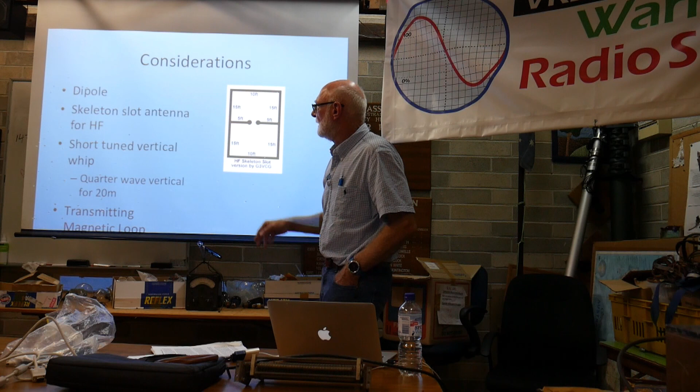So I kicked off with thinking about a dipole. I had a dipole cut for 80 at my house in Linfield beforehand, a sort of droopy dipole, which was a big corner block, and I could actually have one cut for 80 there.

Somebody put me onto the possibility of a slot antenna, and it's interesting if you started with a simple slot, which is a sheet of metal and a slot cut in it, and you feed halfway down each side, you can actually cut away bits of the slot and end up with just something that looks like this, which is still a slot antenna. But this allows you to reduce the real estate that you need, but still problems like with a dipole of you need to have it some metres above ground.

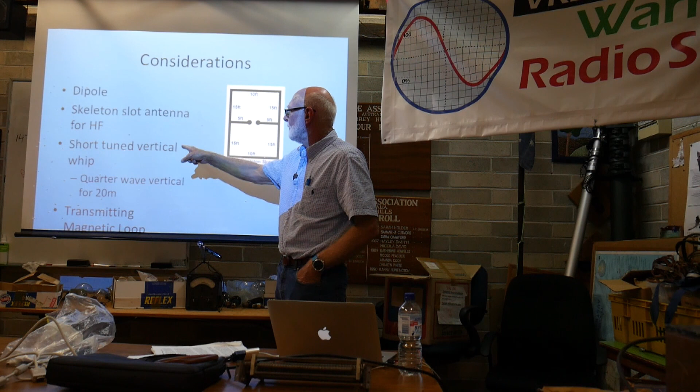I looked at short-tuned vertical whips. I could get just a quarter wave for 20 metres, so it'd be a 5 metre vertical. I looked at that. I looked at putting a slightly longer whip on the end of an ATAS automatic tuner I had for my Yaesu. But I knew that wasn't going to be very successful on 40. I've yet to fiddle around with that a bit more, but I think I'm happier to go in the direction of this transmitting magnetic loop.

What I liked about them is that it's not dependent on needing a good ground. So in a way, if you're worried about RF getting back into you and that kind of thing, it's quite a neat sort of solution. So just wondering at this point, what would people do? Has anybody got any other suggestions on what to consider apart from a magnetic loop in that sort of situation?

Have you tried tuning on the shutters? Yep, like the old crystal set, I'm sure on receive it'd be fine. On transmit, not so sure. You can't get onto the roof? You can get onto the roof, but that's common property, and I couldn't leave a permanent antenna up there. Load up the guttering? Can you buy another house? I could, but I quite like this place, as you'll see.

You don't think the wire around the corner of the roof would be invisible? Well, it would be, but then it's going to be very close to concrete gutter, that sort of thing. Again, it might be good on receive. I'm not sure about transmit. And I've got no way of then changing the orientation of it. Other ideas, though, for small antennas? Balloon. Yeah, well, there are lots of others, kites.

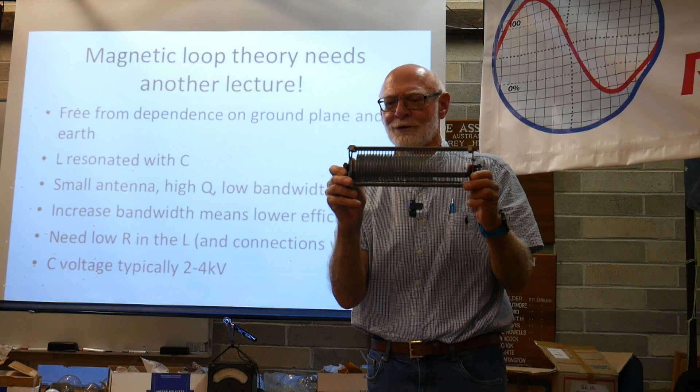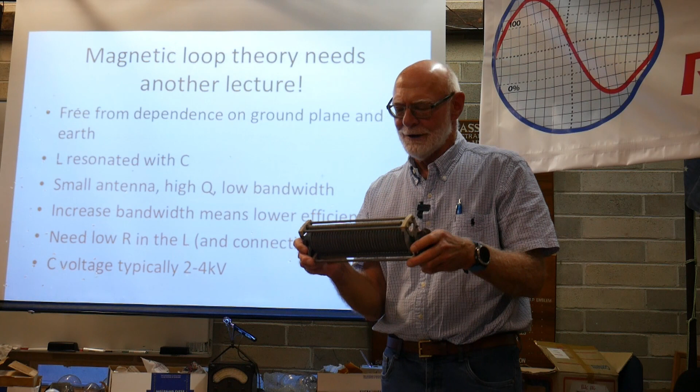And I sort of went to the books and started to look up air spacing and all that sort of thing of what's needed. It's very hard to build something that's nice and easy to use, but where you don't have big chunky things like this happening. Now, a lot of people who have talked about this will say that the best thing you can get's a vacuum capacitor, because that can be very small physical size with no problems with flashover. So that's the ideal thing.

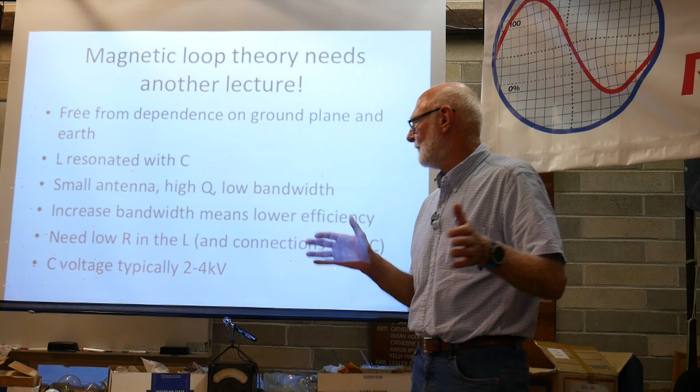You can get a Jennings or Jennings type Russian capacitor for about $200 on eBay, but you've still got to connect that to the L. And if you read Larry's article, you'll see some pictures about various attempts to do that. But then that comes down to construction. If you're going to use copper, you're going to have to get copper onto that nicely, or if you use aluminium, it's all those sorts of problems.

So the coil construction's usually one turn, but it can be 2 turns. 2 turns might seem simple. It makes it smaller physically, but it just gets a bit complicated about the feed point and where you have the capacitor. Copper's usually used, but aluminium, despite the DC resistance being a lot higher, is almost as good as copper at the RF frequencies that we're talking about. So aluminium, in fact, is quite a reasonable thing to do it out of.

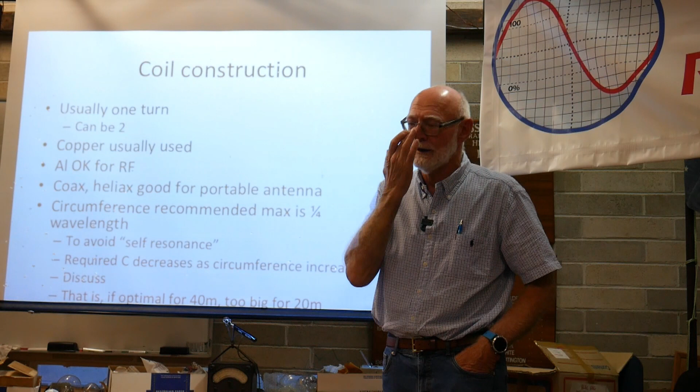And if you want to have one that's portable, then you can use things like coax or Heliax for the coil. In terms of how big it is, and this is where I need a bit more discussion. There are some antenna design things on the internet where they talk about the circumference shouldn't be more than 1/4 of the wavelength that you're looking at, and they say that's to avoid self-resonance.

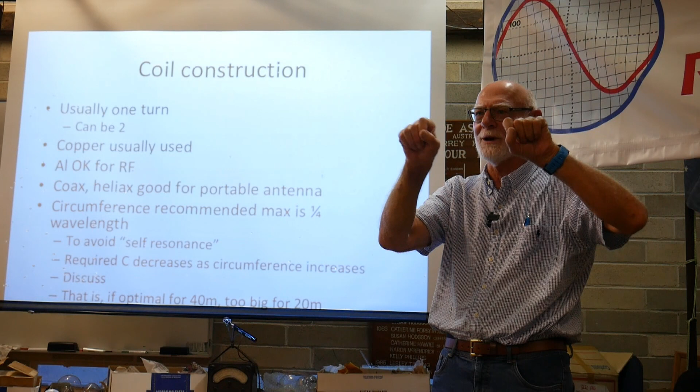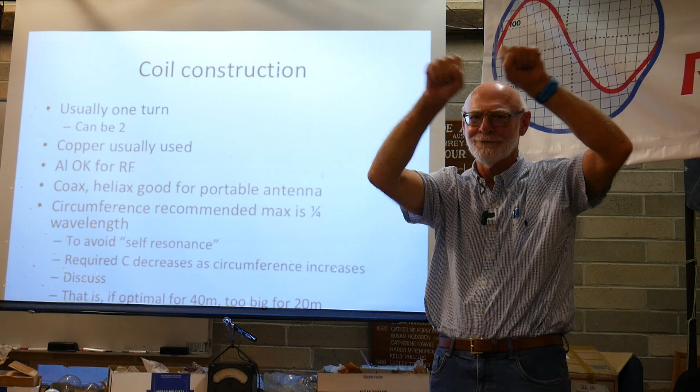And the way I think I understand this is that as the L gets of greater circumference, the amount of capacitance you need decreases, and it gets down to maybe 10 pF or something like that in the end. And I'm thinking that what they're trying to say is that if you get too big on the L, the thing will resonate with no C there, and then you've got a problem. But I don't know. Does somebody know a little bit more about that than I?

The outer's just a shield. Pardon? It'll be broken in the middle. Yeah, the outer's just the shield. So if it's got a quarter wavelength around, then you've got an eighth on each side, and that's going to start resonating if it becomes too much more. The shield itself isn't going to be effectively shielded because it's going to be resonating. No, you use the shield. What I've seen with the magnetic loop uses the inner as the radiator, and the outer is the shield, which is just electrically earthed.

No, my sniffer's got a copper tube, and the coils that pick it up are 6 turns inside of normal wire. That's an electrical shield against electric field interaction, because what you want is magnetic field, and it goes straight through the copper shield. Yes, that's a shielded loop, but this is an unshielded loop. Right, I didn't realise he was talking about unshielded. This is actually the L for the mag loop. This isn't the feed, so you're just using the outside. We can connect up the inner if you want to. I can see circumference being an issue if you have a shielded loop anyway, because the shield's going to start resonating.

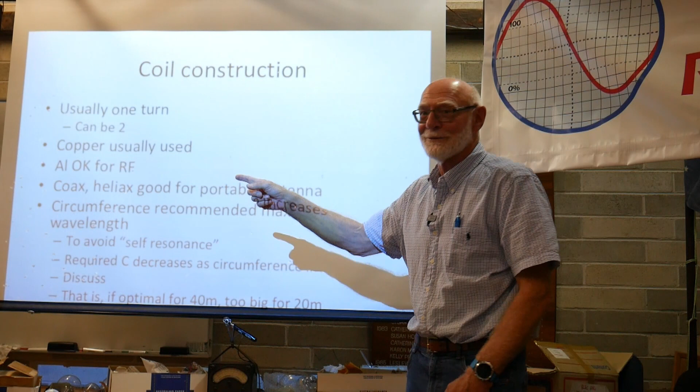Yeah, okay. Well, so I think I need to sit down and have a longer talk about that. And that, like I said, it really is another lecture. But anyway, I think it's to do with the fact that it will just start to resonate without any C involved if you get too big.

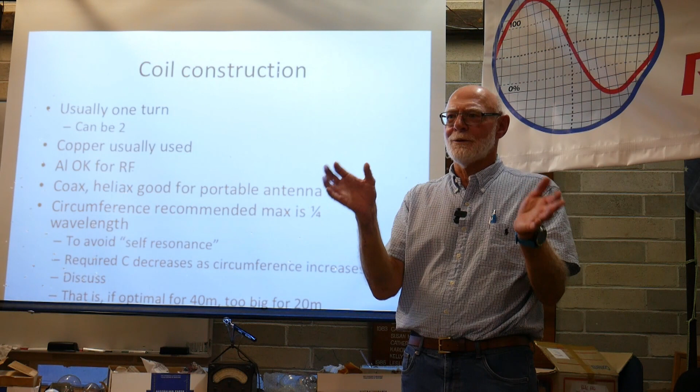And so there's a bit of a problem if you want to have one that will, say, do 20 metres and 40 metres, that if you optimise it for 40, it's going to be too big for 20. If you optimise it for 20, it's smaller than ideal for 40. So various options. You can have 2 separate loops, if you like, and flip from one to the other.

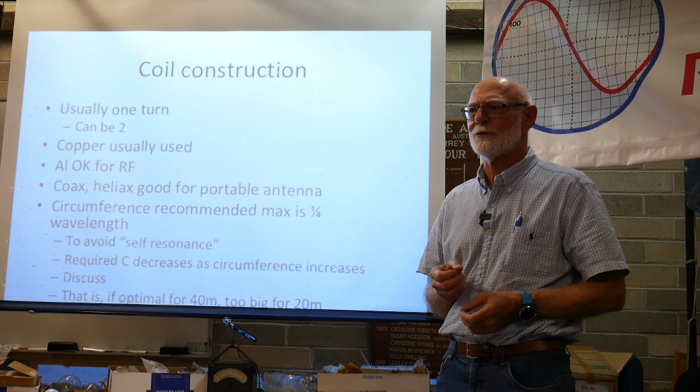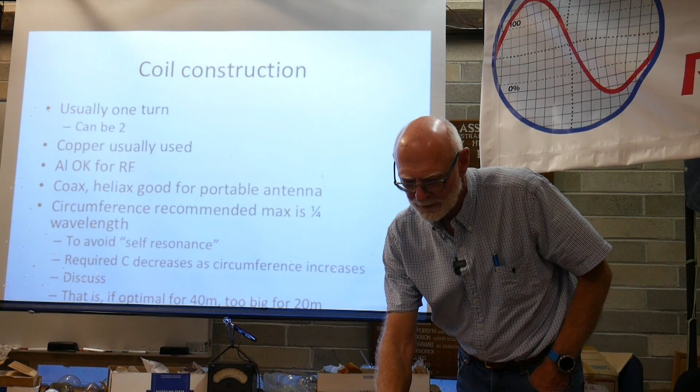If you stick with the one loop and have it optimised for 20, then you've got to be able to change the capacitance quite markedly, because if you need something like 20 pF to resonate it for 20, it's going to need 200 or something like that for 40. So what Larry said to me was that he used copper pipe for his L, and he soldered some plates onto it for the capacitor.

And I wondered if I really could get away with just cutting. What I did was cut some slots in the end of the tube and then flatten them out. And if I could just interleave them like this, that I might be able to get enough C. And I started going back to basics about plate size and dielectric and things like that, and thought that I could make that work.

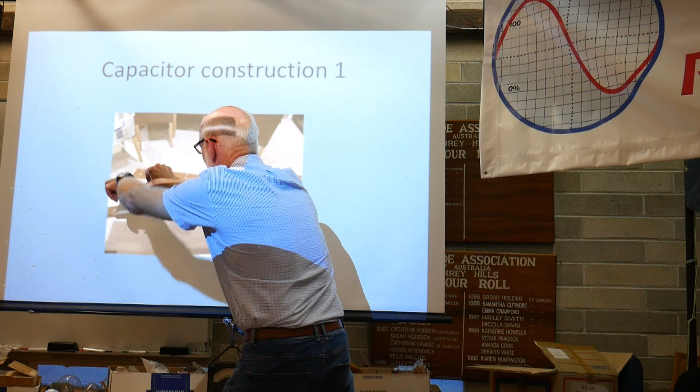So this is the copper that's got a slot cut. If you imagine that went to there, I cut a slot like this, and then the 2 hemisphere bits I just squashed out. Then I actually went as far as buying some polycarbonate from Bunnings. I've got heat shrink here.

I thought about different things, but you need some sort of dielectric that's going to give you more capacitance than just air if you're going to do it this way. If you're just going to use air, you've got to use much bigger plate area. And you've got to make sure then that this is going to be okay. If you're going to feed 100 watts in it, you might have 3 kV across the plates here. So this is how you learn things as you go.

I thought, oh, what I'll do is I'll drill holes in it and I'll put some nylon bolts through it, and that'll mean then that I should be right, shouldn't I? Well, I thought about that and I thought, well, no, because that's going to put holes in the heat shrink, and then potentially you have a little air space that it's going to arc across.

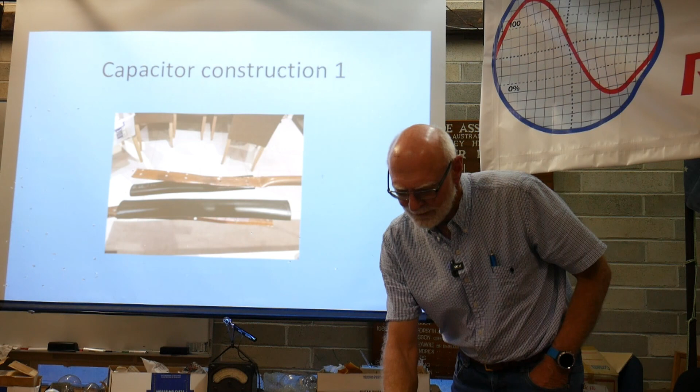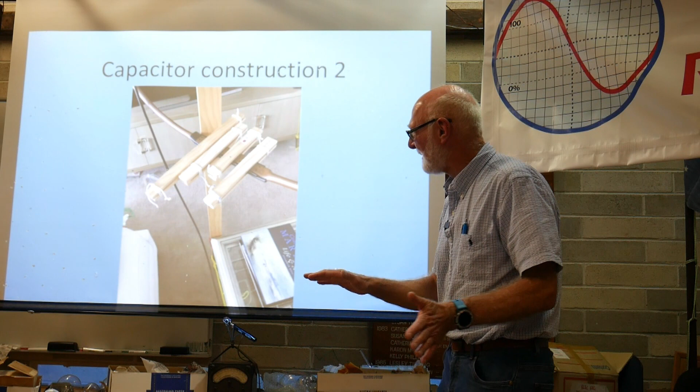So, not throwing the whole thing away, I came back to putting some bits of wood across the top here and squashing them together, and we can have coarse tune and fine tune by slipping these dots up and down there. Ultimately, if you're going to be changing things frequently, you need to get something better than that. But this is sort of...

Sell that to the military. That's right. This is my first prototype.

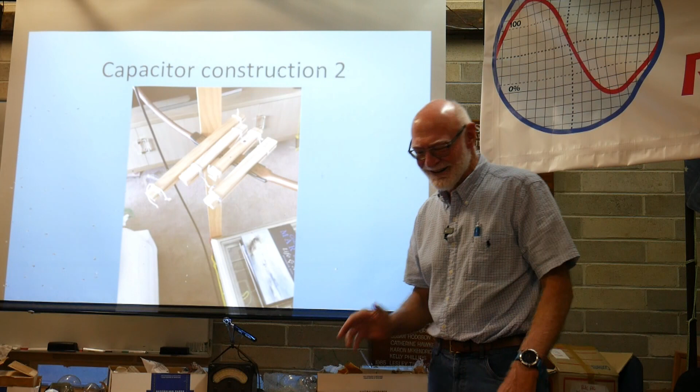Bear with me. And of course, when it rains, the wood swells up and that changes the capacitance, and all sorts of things happen. Anyway, that's where I'm up to with it.

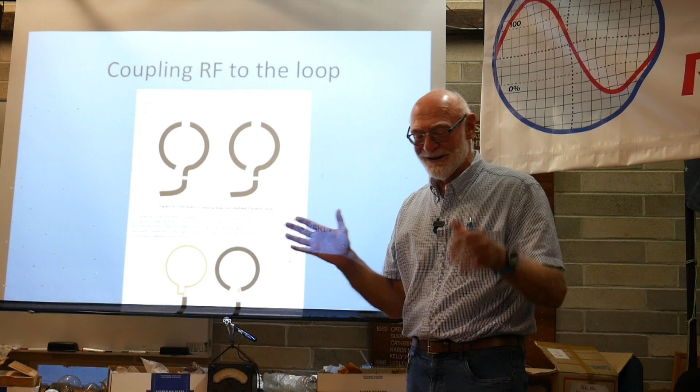So you didn't use cable ties or duct tape? Oh, we'll get to how the feed line sits in the L. It's only a prototype, Phil, isn't it?

It is. Okay, so then we're down to how do you feed this thing? So what Lee says is the best thing is to use a fully balanced Faraday transformer coupled subsidiary broadband impedance matching loop with a 5:1 diameter ratio, and that's the preferred way of doing it.

Now, I'm not quite sure I understand why this is a Faraday loop or what a Faraday loop is, but anyway, just from a structural rigidity point of view, because this thing's got to sit inside the loop, I preferred that over that because this bit here is going to be all wobbly.

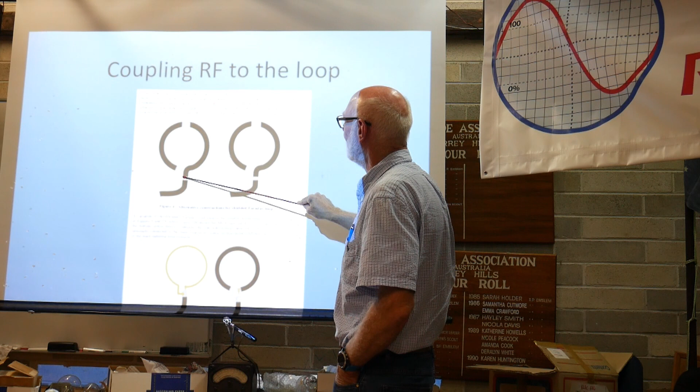So basically, if you think the signal's going to come along here, this is electrical now from your transmitter, along here, along the middle here, and then to the outer there, and whatever that does there, then I guess it goes up here. Not quite sure I fully understand that.

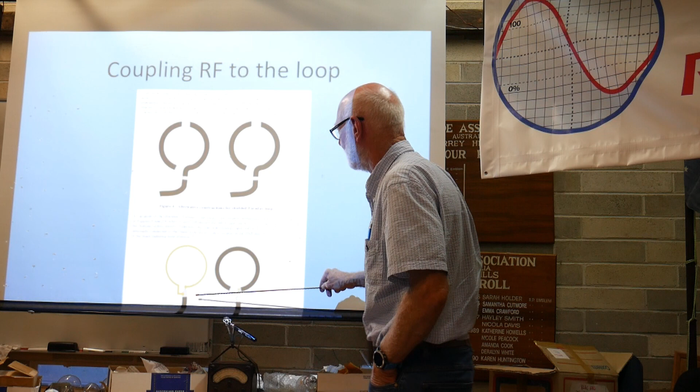An alternative to feeding it that way, though, is to just use an open loop, like an unshielded loop like this, where you just have the inner and a loop going to the outer. So you can do it like that with a bit of copper wire, or like this with a bit of coax if you want to.

That's just going to the centre conductor, going to the outer there, and the outer's just to the outer there. So effectively, electrically, it's the same as that.

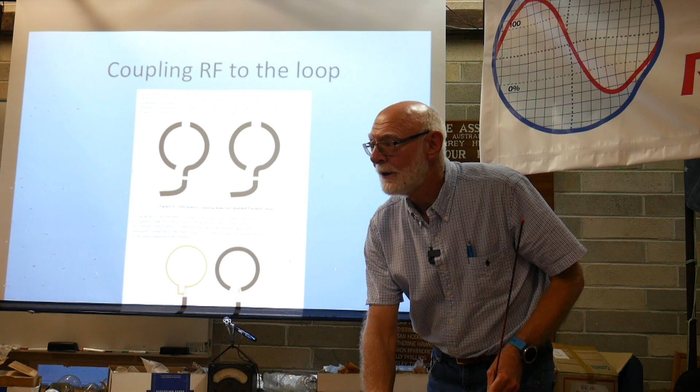Is it possible to focus that a bit better? Sorry? Anybody know how to focus the machine a bit better? I think it might be the quality of what I've done possibly, but no, that's the best you're going to get. Did somebody say we needed a new projector? Was it? Russell said that.

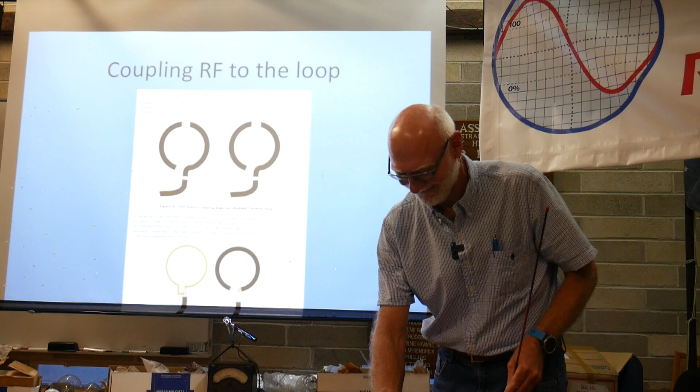Now there are different ways of coupling it. You can use a gamma feed, a fixed one or an adjustable one where you can slide this along. Oh, hang on, I think it might be that, but it just slides along. Anyway, you can slide along to change the feed, and you can use the sort of transformer matching. What was that? Something on the bottom there. Can't read my own writing. Anyway, this is a sort of transformer matching that you can use.

Phil, I've been following your journey since the middle of last year, and you ring me up and say, can you hear me on 7045? But I think I'm probably one of a few people here that know you're not planning to put a tunable capacitor there, are you? Yes, ultimately. Well, no, actually, I think I've almost. Not as we understand a tunable capacitor.

No, well, I think I'll get onto that because there's a version of this which was published in Amateur Radio end of last year, which is designed for portable use, where it has a sort of feed with a capacitor and you can tune it fairly easily. Okay. But the problem then is putting voltages and things like that through it. It's just very hard. When we talked on the phone, the idea was that the flats on the end of the tube became the capacitor, and that was where your critical spacing came in.

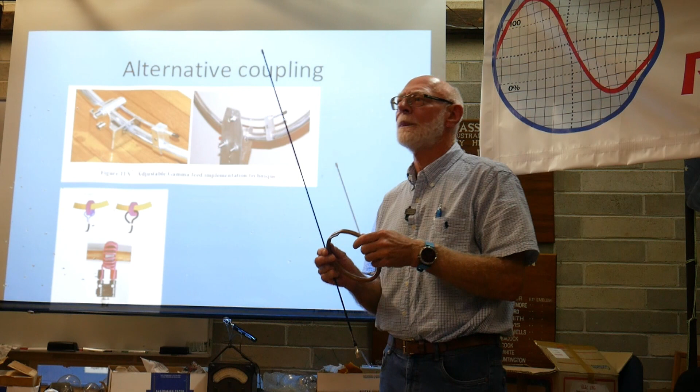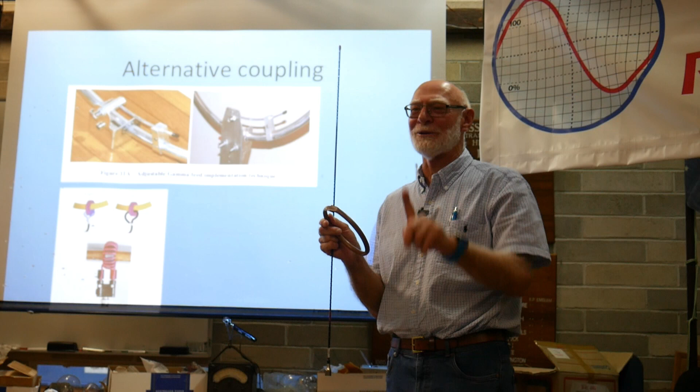Correct. And you're not going to have a capacitor like that one on your desk at the base of the loop, are you? This is a cut down version of what I've built, if you like, except I haven't split the tubing. I've just put it like this, and in fact this is one that should be the right diameter for 2 metres. I thought I might give it a go, and I think that sitting on the top of my car might be better than something sticking up that always gets caught when I drive into my garage without checking the height. But that is the capacitor.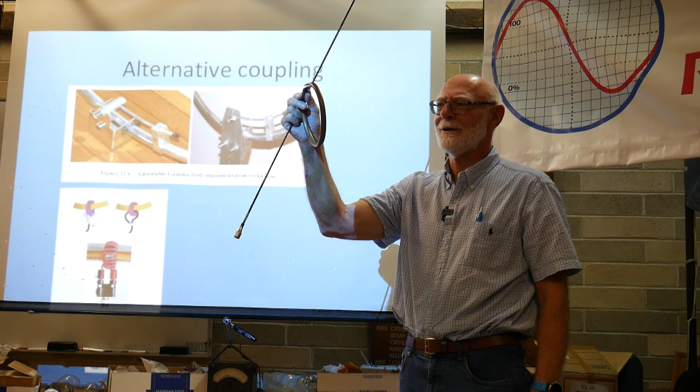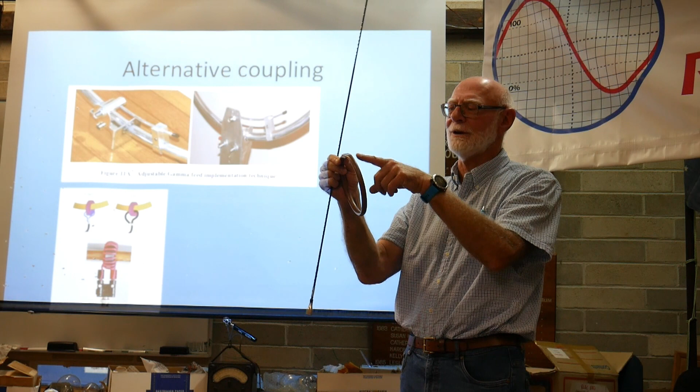So the point is that it's important to have as little resistance as possible between the L and the C. Well, there's the 0 ohms resistance. So if you can make this C work, whether you want to have it fixed or variable or whatever, that's going to be ideal. Anything else, where you want to vary it, you're usually going to have to connect up the L to the C. Yeah. And there are plenty of magnetic loops out there that have a box at the bottom with a knob on the front, right? You're not going to have that as such, are you?

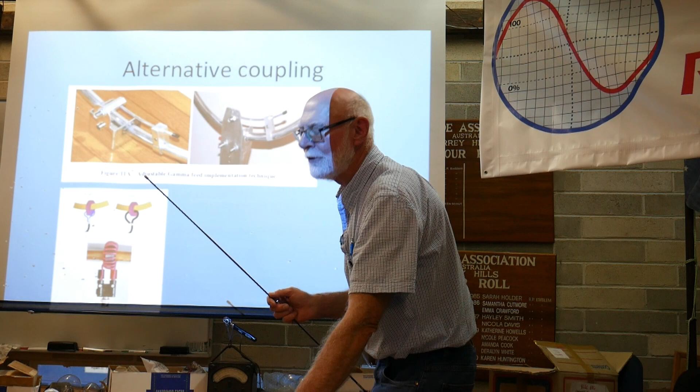Not with this setup, but what I had originally in mind was with bits of wood that I can organise something to squash it and open it, and do it remotely. So I think it's still possible to do it, but I need to work on that a little bit more. Okay.

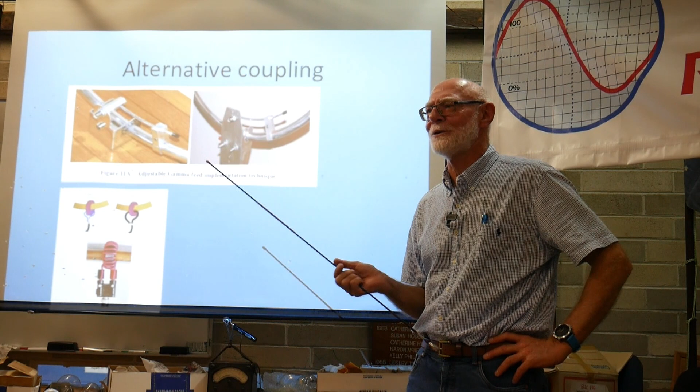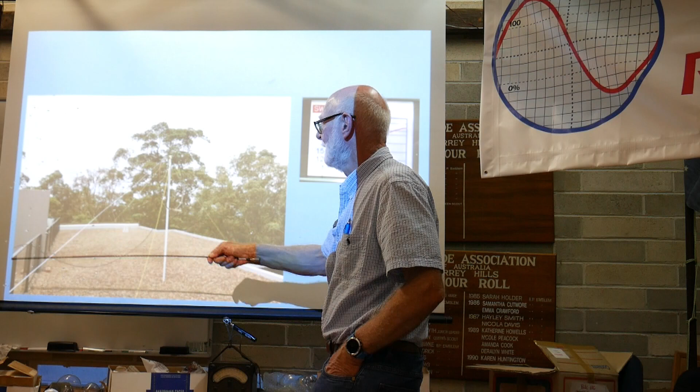So I had fiddled around with it inside my lounge room, on the balcony, and I finally launched out onto common property here and put it up here. So here's my loop, which is about 1.3 metres in diameter. That circumference is about right for the maximum circumference you can have for something to work on 20. My capacitor's here at the bottom and the Faraday loop feeding it at the top. And here's the feed line here.

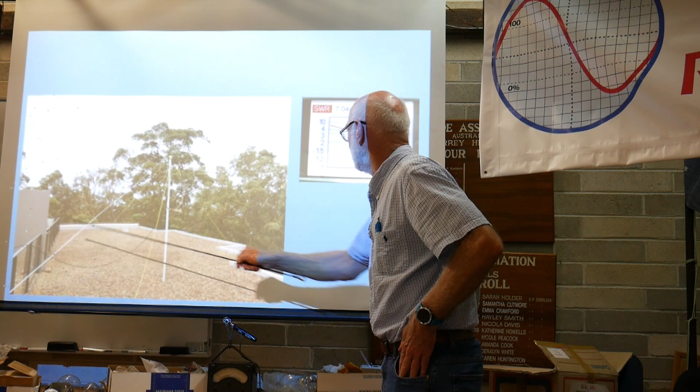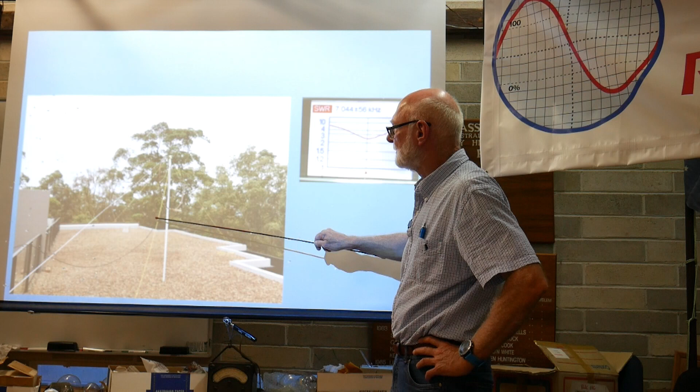And with this, either there or even inside, I just couldn't get the SWR below about 2.5. And it's a bit unclear in Lee's article. He talks about putting a choke in close to where the loop is, and I wasn't quite sure whether that's a necessary part of it and whether that would make any difference, whether I've got some sort of common mode currents that I need to get rid of. So maybe with some discussion afterwards, people might help.

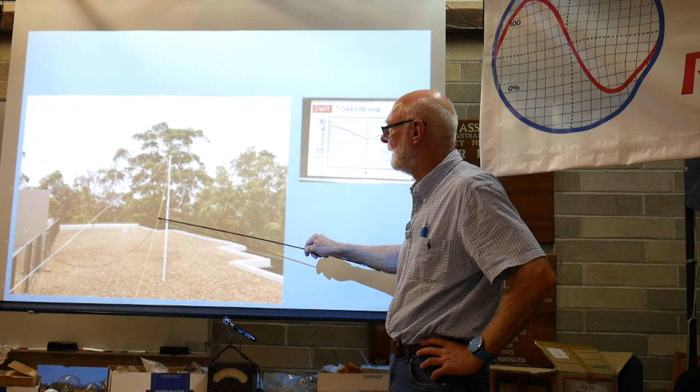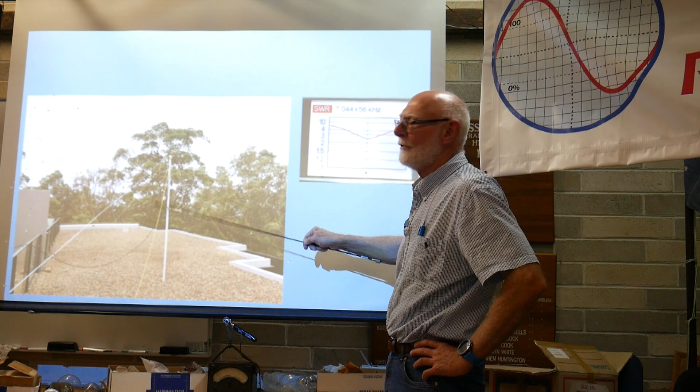But I did try when I had this fed with some RG58, that smaller diameter coax. I did try a choke without really thinking too much about how many turns and diameter, and it didn't seem to make any difference. But that's something more to work on.

So I think the next slides, these are the ones where the audio didn't come out, but I'll play them for you at the end to show you, because I did get it going on receive quite well, and I was pulling in VK3s, VK4s, VK5s very easily, some good VK2s, and I can play you some audio of that at the end. So certainly on receive it's okay, but I just wasn't all that confident, with the SWR at 2.5, about pumping too much power out through it.

So here's where we had it all. Greg, I think, asked me about how I was holding it all together. Well, here's how it's all been held together. There's the capacitor there. This is the other end of the loop, and this is the Faraday feed for it here. And I had the orientation of this like this. In this shot, this is looking up to the sky, so the bit of wood's just to help keep the loop in plane with the coil.

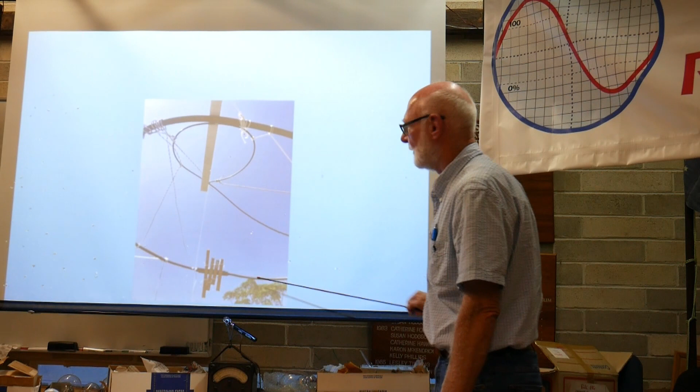So this is it looking from my living room out to my balcony, and then beyond the balcony is the common area. So the previous shot showed it out in the common area there. This is just within my property. And I can assure you that the loop here is perfectly in plane with this, despite the slightly bodgy look of it. But obviously you can see that's a prototype for low wind conditions only.

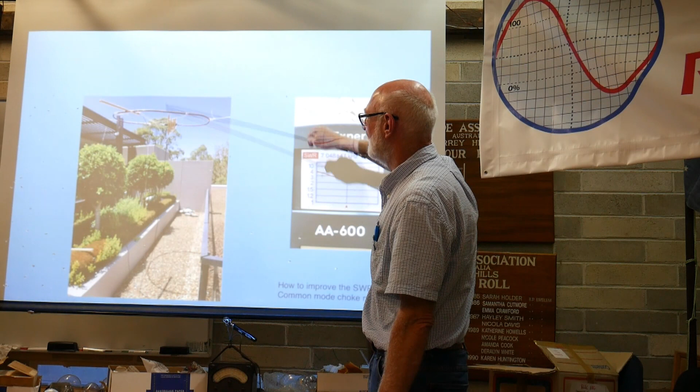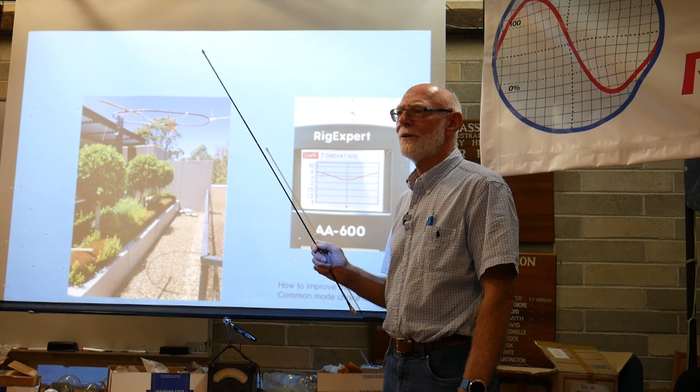Is that loop horizontal? That's horizontal. So you can run them horizontally or vertically. You end up with a null like this. So that's not bad for giving you a pretty omnidirectional propagation pattern. How directional are they if you put it vertical on a rotator? Yeah, they are quite directional. There you've got a null here. So the radiation's a bit like a figure of eight, a donutty thing all around it.

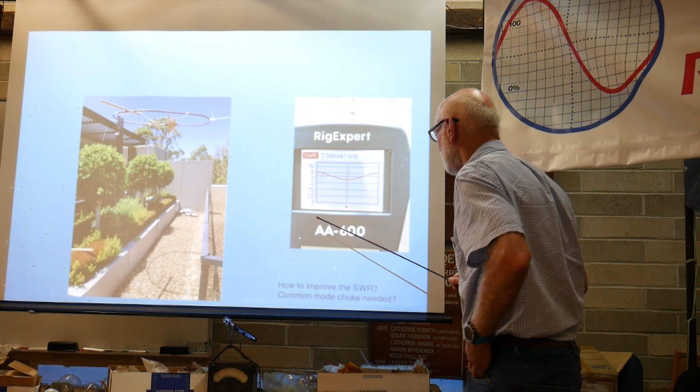Now still with this, I've still got an SWR of 2.5. Just like to draw your attention here though, so if anybody's got any ideas about what to do, whether I need a choke or I've done something stupid here, about what I can do to improve it, I'd be grateful. But just draw your attention to this. Here's 7048, which is the centre frequency here.

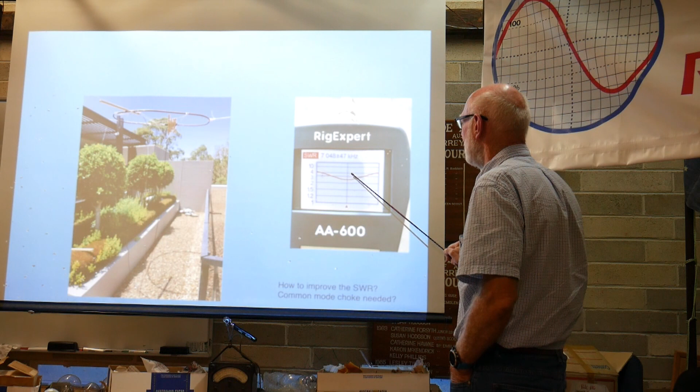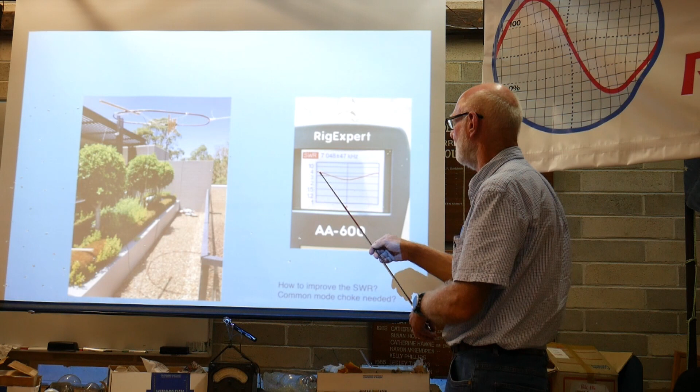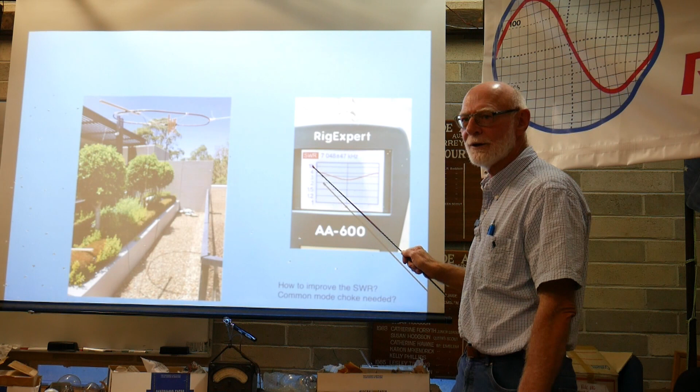SWR's along here. And you can see that the SWR at 7048 minus 47, so just at 7, is going to be 4, and 48 plus 47, 7095, is also going to be 4. So you can appreciate it's got a fairly high Q. You go from 2.5 up to 4 in the space of just 50 kilohertz. That's characteristic of all of these, and that's why you've got to retune them just over each band. You can't just have it broadbanded enough to work on the whole band.

Just apropos what you said, Russell, this came out in Amateur Radio just at the end of last year, which was a loop and tuner for 1.8 and 3.5 megs. And here's the schematic for it. Sorry it doesn't come out too well, but basically you've got the loop, you've got a couple of variable capacitors here, variable capacitor here, and that's coming straight into the feed from the transmitter.

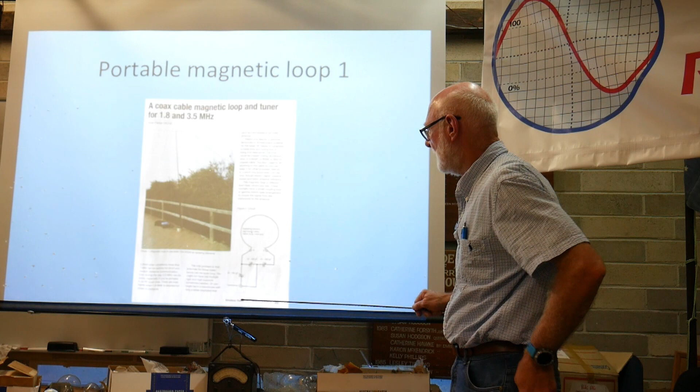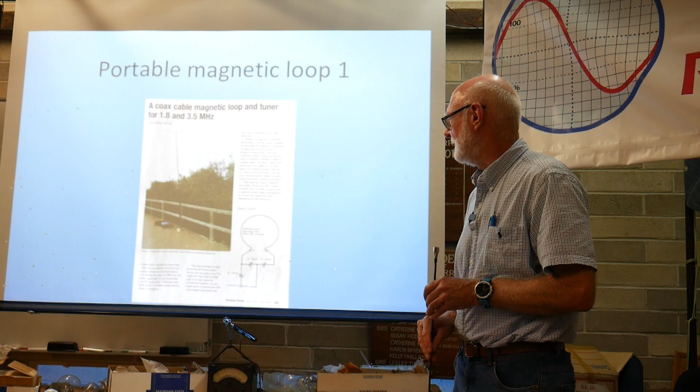And I've got the bits to build that. I was going to build it down in Native Dog Flat. Didn't quite get around to it because of a bit of an issue with bushfires and so on. But this is just a 3-page article, and here's a little box with the 2 variable condensers in it, so there's a tunable one. But I don't think you could put more than about 20 watts through that without it arcing.

This is just the outside of the box, and it just had normal HF type connectors here, and this is just ordinary coax. We're using the outer for the loop, coming around something like that. And look, I'm not sure which connection is what. I think these might actually be for the loop, and this is the antenna feed. But that might be something that I might end up just using at home anyway, and just seeing how it goes.

The trouble is you do want to be able to transmit something decent on it. As I said, just a 3-page article, which is fairly simple. And this is the video I couldn't get to play, but I will get it to play at a subsequent time and show it to you. I'll get the right codec. The bane of my life.

They say you shouldn't give lectures with anything to do with children or animals, and videos is the modern day thing that you really shouldn't do too. So it's just going to take me a little while to get these audios to play, but if somebody's got some comments to make while I get the audio going, that'd be good.